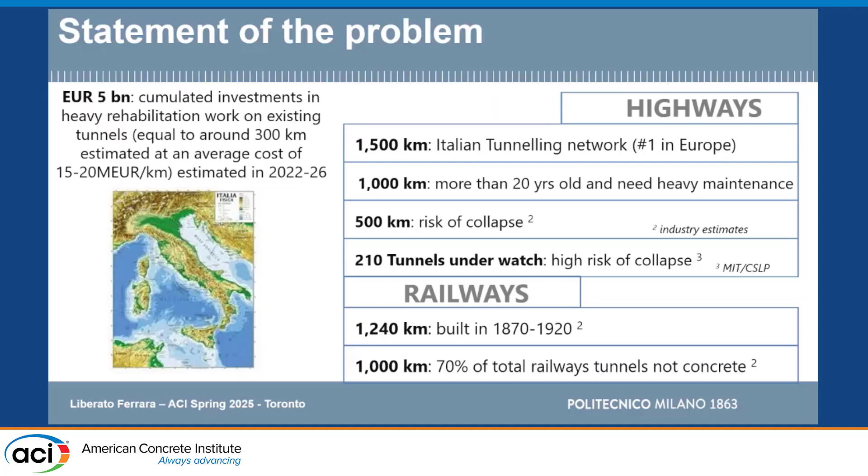What does retrofitting a tunnel imply? This, that you have to interrupt the traffic because you need to make works, and especially if you are in high season or festivities and so on, where people move from one side of the country to the other, you have

cars and people and trucks carrying freight stuck into queues. And this, besides the annoyance for the people stuck into them, has a very strong economic impact.

A university in northern Italy has estimated that the lack of critical infrastructure, and so the fact that we are forced to interrupt traffic because of the need of retrofitting, results into a loss in the gross domestic product of 36,000 euros per kilometer per day.

It's a huge number. But also this is something which reflects on each household, because each one of us can be affected by this, and this results into a loss of money for each household that has been estimated at about 3,500 euros per year. Money that goes nowhere, is spent into extra cost and so on.

So there is a huge need of finding effective solutions for retrofitting our tunnels in a fast, but in a structurally efficient and sound way.

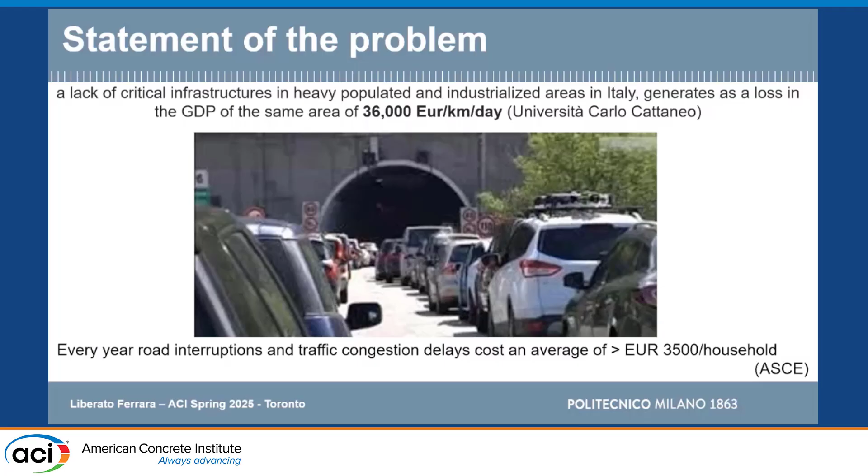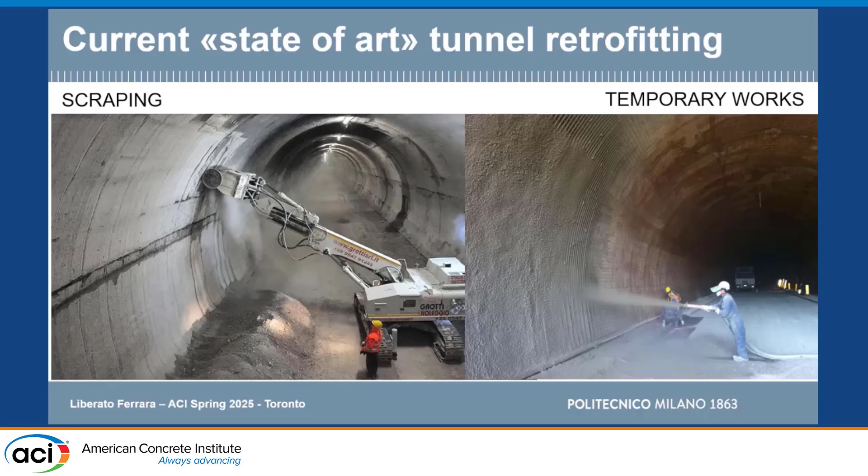Well, technologies are quite common. You go into the tunnel, make some scraping to remove the damaged layer. You have to estimate how much thick is this layer that you have to remove. Then you can do some temporary works with shotcrete, and then you can use completely cast-in-place technology, or you can use some partially precast technology.

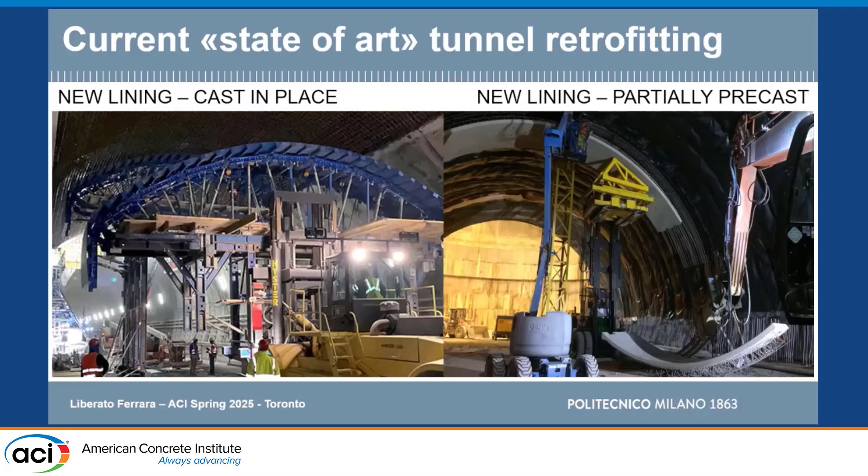This is how we do, more or less like this. And with this company, this is a startup - actually the idea was from one of our former students in our university. The company is called Hinfra. They patented, and we collaborated with them to patent this new technology.

This is their main robot, let's say. There is this scraping modulus here, which advances, and then you have this formwork here - this is the bottom formwork of the new lining, and the existing lining for the top part.

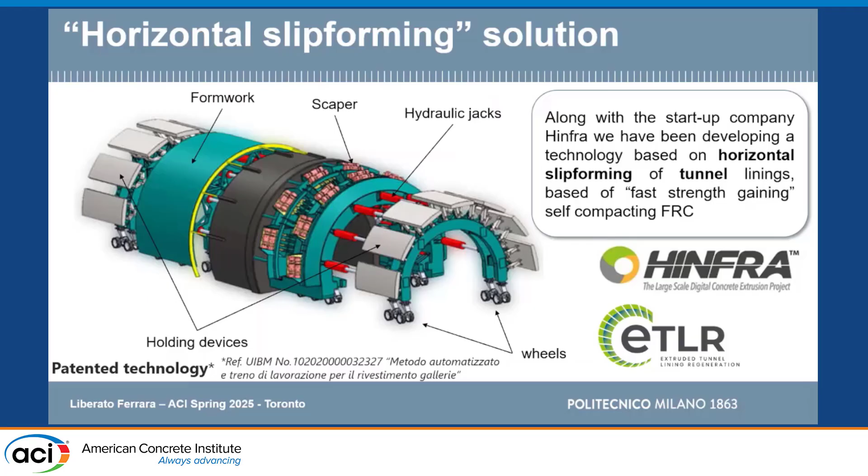So basically, the technology, as I said, we mutuated some ideas from 3D printing technologies. What is 3D printing? You deposit a layer of concrete, and the concrete immediately, in that case, holds its shape. So we worked out a mix, and actually the first trials were done with this robotic arm, which was a robotic arm that was used for 3D printing.

We built up this small mold, and we tried to see if we cast this concrete and it fast sets, we can move ahead this modulus. So we horizontally slip formed, in a sense, the tunnel.

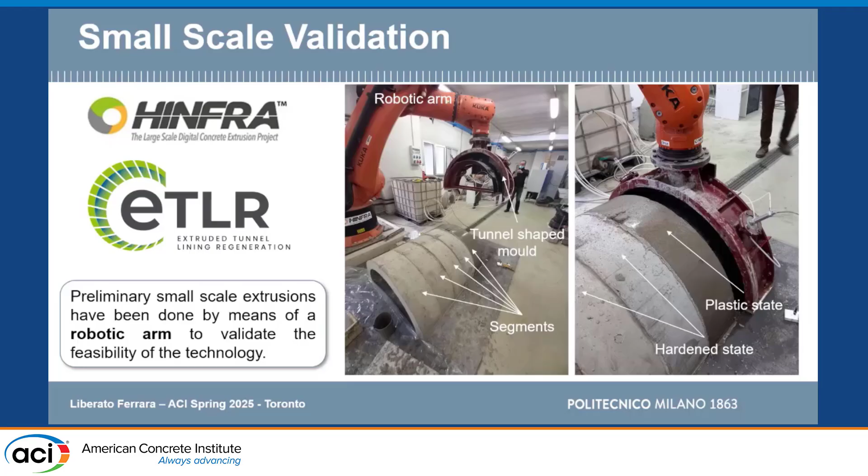So with this mix, which is SCC, which has a particular mix design employing SCMs, but also has a fast setting, we can greatly increase the productivity of the retrofitting train, and so have a real case in which the time in which you are forced to interrupt the traffic is much, much shorter.

So the company prepared us this full-scale test bed. Actually, this steel structure simulates the existing tunnel, and this is the moving modulus. Basically, this is the inner formwork. You go with a pump, you cast the concrete. I will show a video then, and you then advance when it's ready.

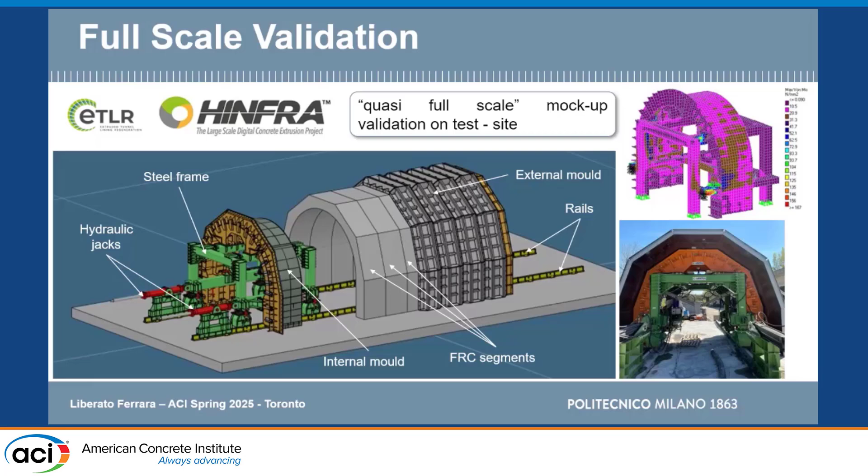And the technology works in this way. Let's see if this movie works.

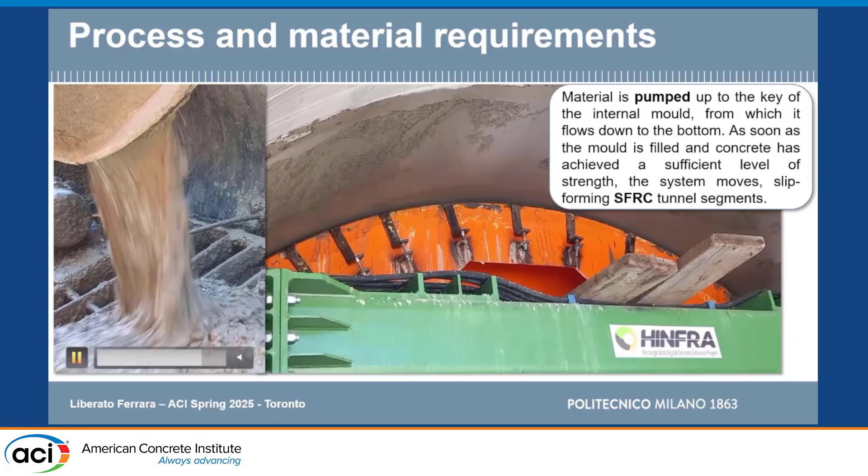So you can see this is our fiber reinforced SCC. You can appreciate here the fibers, which are clearly visible. After about 1 to 2 hours, depending on the mix and the season, you can slip form your tunnel segment, which is pumped from the key. You can see the slip forming mould slightly advancing. So in about 1 to 2 hours, you go from here to here. And we were able to measure the strength development from the very early ages.

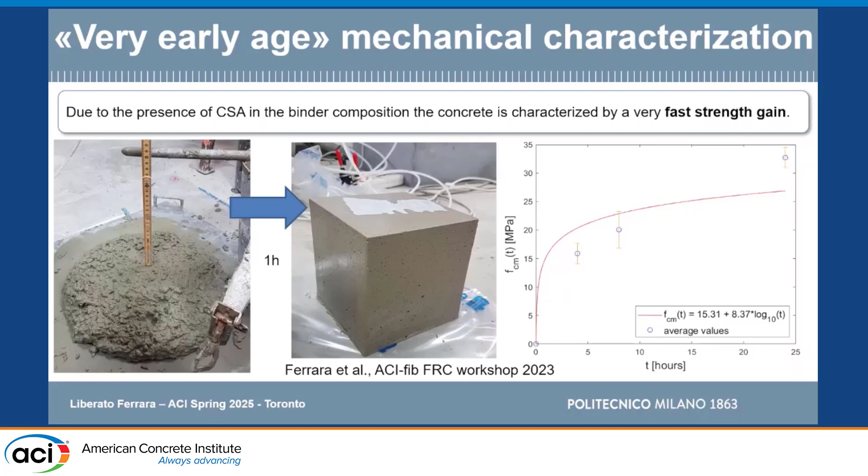So this is at 4 hours, 8 hours, and then you continue with the normal hardened state measurements. Actually, tomorrow in the first session of the early age properties, I will have another presentation dealing on what happens exactly in this window here, which is where you have to take the decision: how fast can I slip form, and how can I control the productivity.

But what was most interesting, as I said, this was a fiber reinforced SCC. So the compressive strength was interesting, but also the toughness. We performed the toughness test starting from 4 hours. This was really the minimum time for the specimen to be demolded, handled, and tested in 3-point bending, and you get curves like this.

Where you identify these residual strength values at 0.5 millimeters and at 2.5 millimeters. According to the European standard and design codes, they are noted as FR1 and FR3, and you provide a toughness classification of the concrete based on the characteristic value of this strength and the ratio between these two. So the first number you see here, 3, 4, 6, means that at 4 hours, 8 hours, 24 hours, you are able to guarantee a characteristic value of the residual strength equal to 3, 4, and 6 megapascal.

And you use this in the design. This letter here, E, means that this second residual strength is at least 130% of the first. So basically you have what we can call a deflection hardening, or a deflection quasi-plastic behavior, and you can see these curves which were calibrated for the hardening of the material.

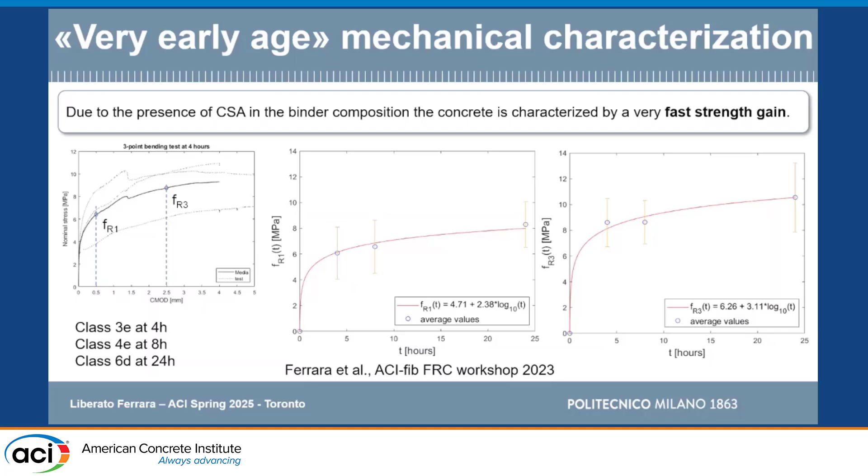Well, the first thing we did is, after 4 hours, ask: is this lining safe for people to move, for the work to move throughout the tunnel? Because at that point you need the crew to go in and do the job. Not only did we check the safety of the new lining for its own self-weight, which is what is required, but we also checked the transient and accidental situation where the existing lining can, for any reason, fail, and so immediately transmit all loading also from the surrounding rocks and so on to the new lining.

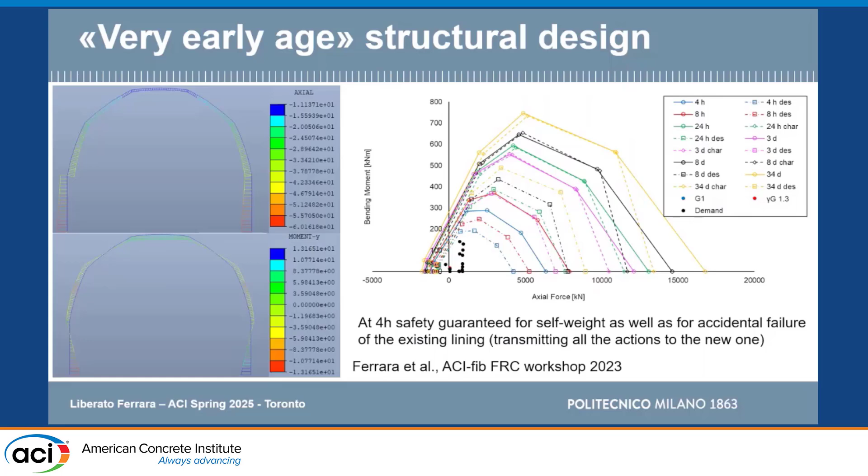You see that all these black dots represent different combinations of actions for the different situations that we examined, and the smallest moment-axial force domain for the cross-section of the lining at 4 hours, applying all the material safety factors recommended in the design, is guaranteeing the safety.

Well, this was a design calculation. We then went into testing, into validating this on a full-scale mock-up that was casted. Actually there were 2 identically, or nominally identical, mock-ups, which were slip formed according to the technology that I showed.

They were slip formed at the company test site, and then transported into this lab, which is a lab owned by the European Commission near Milano, where we put the segment horizontal in order to apply the loading to it. This is a sketch, as you can see.

We had this constraint which simulated the bottom part of a tunnel lining, and we had 7 actuators which can be commanded independently, either acting as a fixed constraint or applying a load, because we tried different load combinations according to the different case studies that you can have.

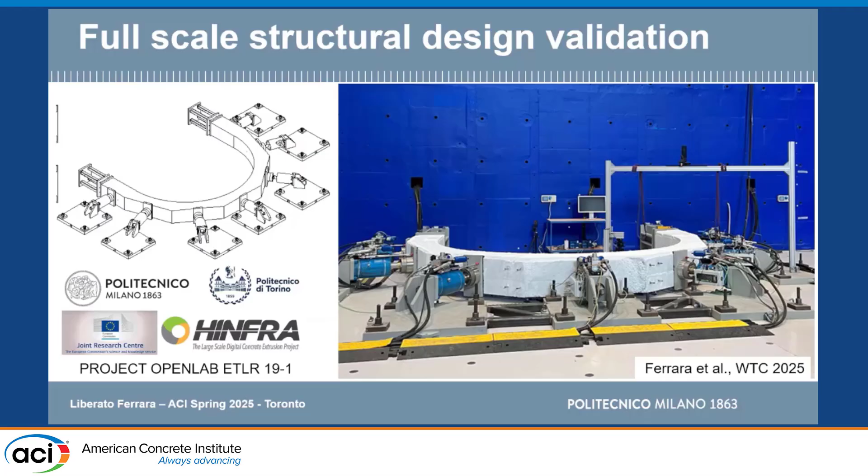This was a collaborative project funded by the European Union, and together with the company we worked on it, Politecnico di Torino also collaborated with us. As a matter of fact, you can see this is one of the situations: we applied the load here and applied the load here, and we got very, very nice results.

These were 2 full-scale mock-ups, nominally identical, which provided a fairly repeatable response, considering you are dealing with a 5-meter diameter lining. The black curve is a simple model that we performed with a professional commercial finite element software. You're dealing with plastic hinge models just to simulate the response, which provided a good, fairly close agreement with the experimental results.

So the methodology that we proposed—obviously in the software we implemented some cross-sectional responses based on the recommendations of the design methodology for fiber-reinforced concrete that you can find in Eurocode 2, in FIB Model Code 2020, and in ACI 544.4R, because we implemented that.

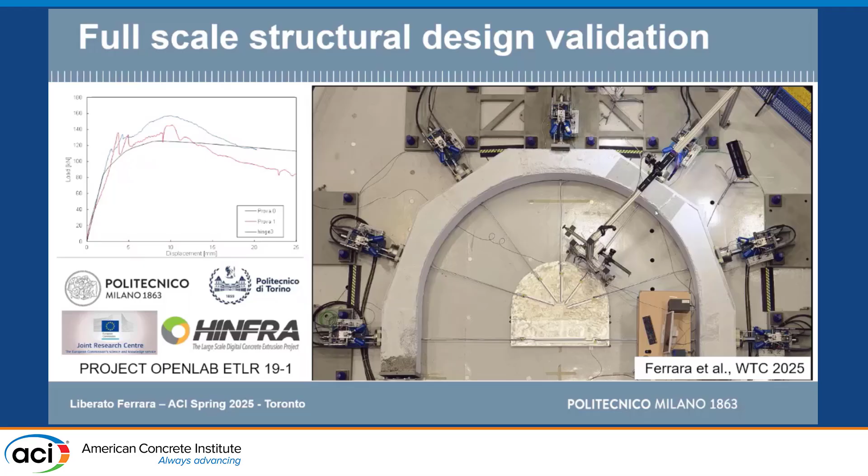So at this point, we were happy about that. And you can see here some of the cracks that were formed according to the test methodologies.

Where does the sustainability come in?

It comes because we scaled up to a real tunnel. It was not a very long tunnel, about 130 meters long, but was on the Italian main highway, the one going from Milan down to Rome and Naples, near Florence. As a matter of fact, it's the craziest junction in the Italian highway network.

This concrete was 60 years old and needed retrofitting. It was retrofitted with new technologies, but we had to prove the sustainability advantages with respect to a traditional technology which employed conventional reinforced concrete.

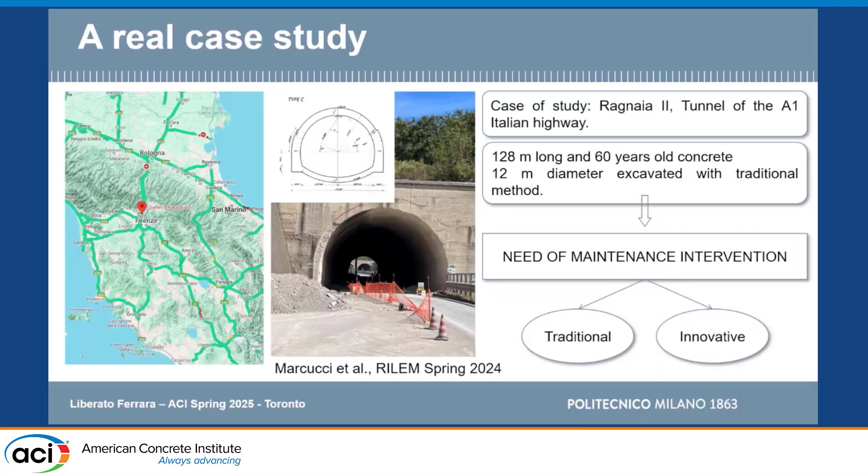So we studied a conventional reinforced concrete retrofitting, and these are the different job site operations and stages we had to perform. The main thing is that you need about 1.5 months over a 130-meter long tunnel to detail the reinforcement and install it before casting concrete. You proceed step by step, but this is the total duration of those operations.

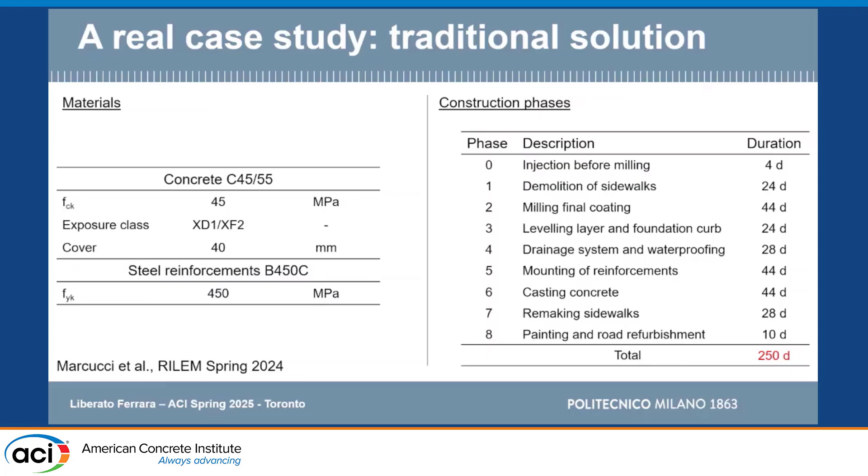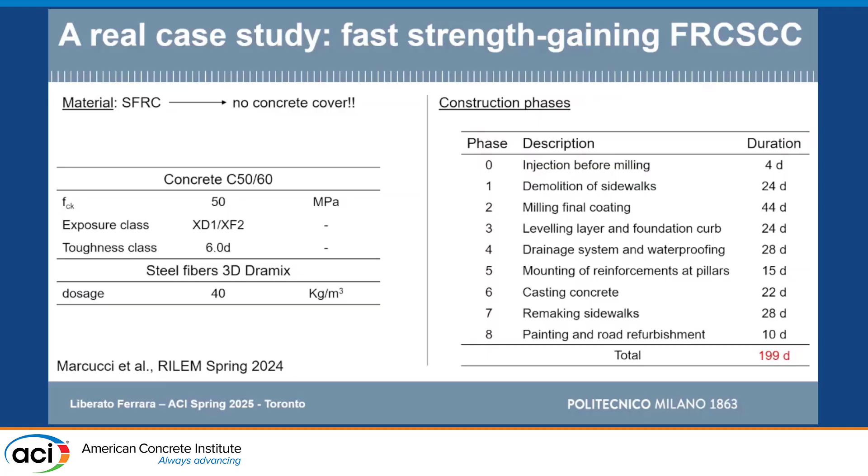Just focus on that. When we went with our fiber-reinforced SCC, there was no need of reinforcement except for the bottom abutments, and we went down to 15 days plus 22 days. We saved a lot of time because we eliminated most of the reinforcement, and also saved time on casting because of the fast setting, which allowed us to demold earlier. So the whole productivity of the job site went quite fast.

These were the input numbers for our life cycle analysis. We used conventional software for LCA, SimaPro, and limited ourselves to a cradle-to-gate analysis, delivering the new tunnel to the stakeholder. As you can see, if you combine concrete and steel, this is always the right way to make the comparison when dealing with fiber-reinforced concrete.

Fiber-reinforced concrete already has some reinforcement inside it, and that reinforcement has an impact. Ordinary concrete does not have reinforcement, so you have to sum that up. But at the material level, there was already some saving, about 4%. That 4% may not be enough to convince the stakeholder to go for the innovative solution.

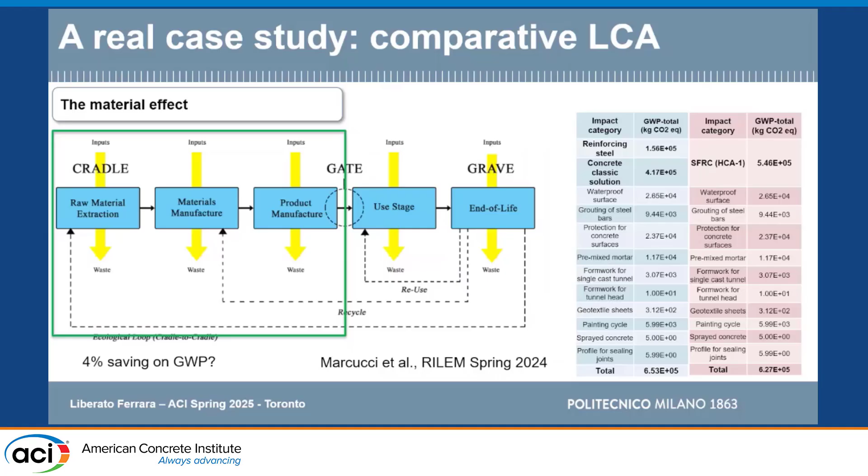But the great saving came from the fact that, summing up the duration of operations for the traditional technology and the innovative one we proposed, over about 8 months of job site duration, we achieved a reduction in construction time of 51 days. That's about 2 months - you have to close your highway piece by 2 months less.

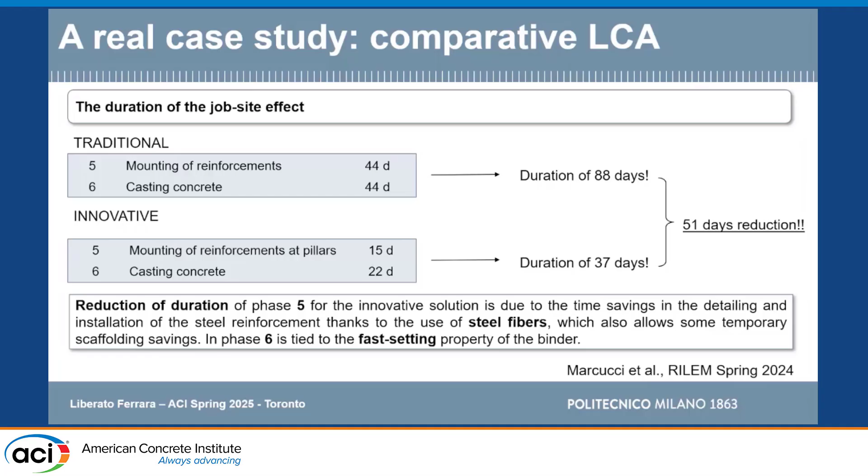The thing is, how can we now transform these savings, this shortening of job site duration, into impacts, into costs? The methodology is quite consolidated. You have all the equipment and machinery needed to perform operations on the job site, and you have to estimate the consumption of gasoline, of oil, and the time of the workers to operate that.

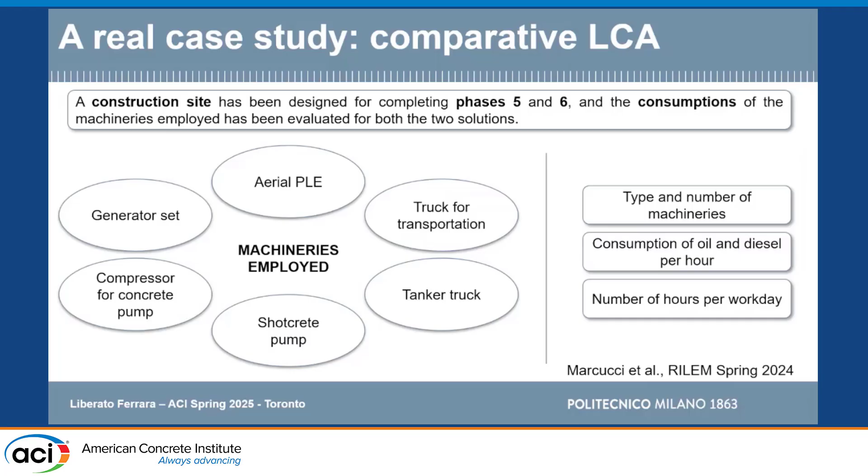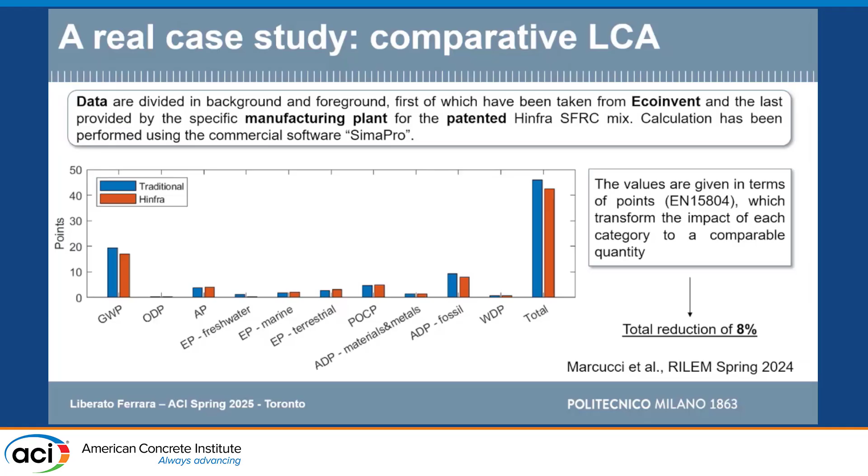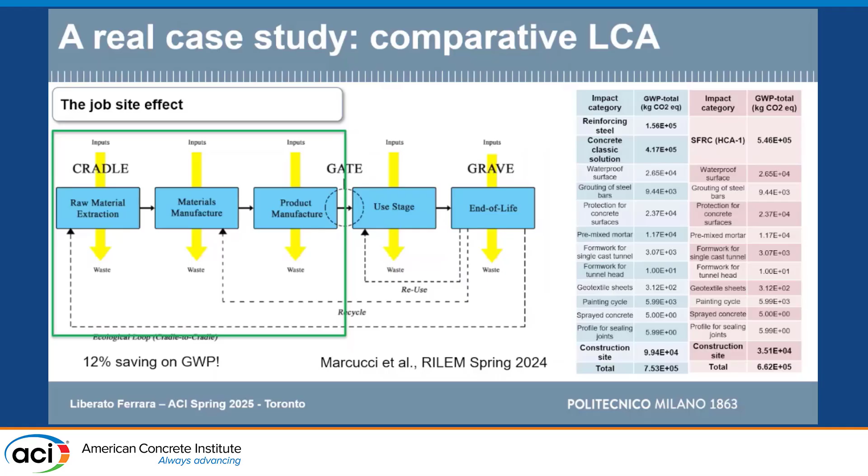This resulted in a total reduction of job site impacts of 8%, with different savings depending on the global warming potential - this is the most interesting one. So the total saving was 12% on global warming potential and even more on other indicators, which was quite enough to convince that with this technology using SCC, a mix targeted for lower embodied energy, a fiber reinforced SCC which also helped save on reinforcement, you achieve this saving.

The most interesting results come anyway on the social aspects. Any hour spent in a traffic delay has been estimated at a value of about €9, could be $9.5 US dollars, something like that. But any time a freight truck spends in a queue in traffic values about €35.

So we worked with the Italian Highway Authority on that junction of highway. Every day, 30,000 passenger cars and 5,000 heavy goods vehicles pass through. So if you estimate an average traffic delay of 1 hour, which in some cases may be optimistic, for the total 51 days saved on the job site, the numbers are huge.

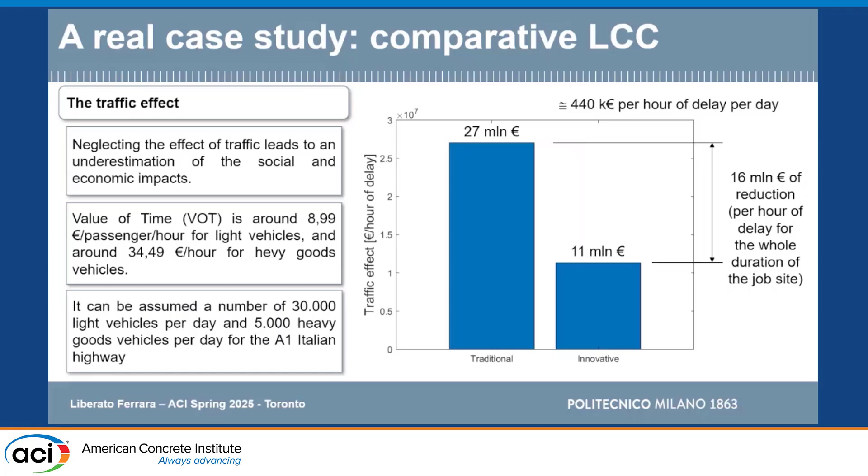This is something we are currently working on because these numbers have to be dealt with care. But there is another important part of the work we are currently tackling, which is the improvement in accident rate you can have if you close your traffic for less time. These numbers must be handled with care, but surely this results in additional social benefits, social sustainability, that a better material, a better concrete, coupled with a better construction technology can allow us to achieve for our infrastructures.

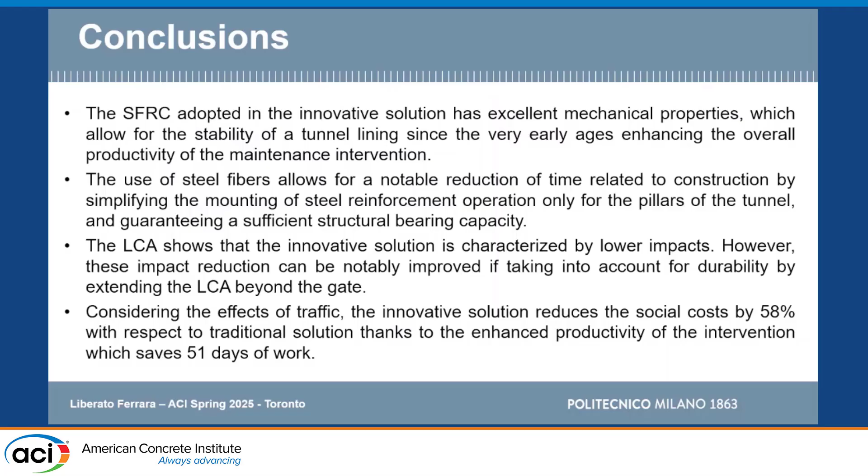So basically, summing up, we have developed a low-carbon fiber-reinforced SCC, steel fiber-reinforced SCC, whose key property was fast strength gaining, which greatly improved the productivity of these tunnel retrofitting technologies. The life cycle assessment showed interesting improvements across all environmental indicators, but even more interesting are the benefits that, considering the traffic and the beneficial effect of a shorter job site duration and shorter traffic interruption, you can have on the overall sustainability of the job site, with interesting social impacts. And I thank you for your attention.